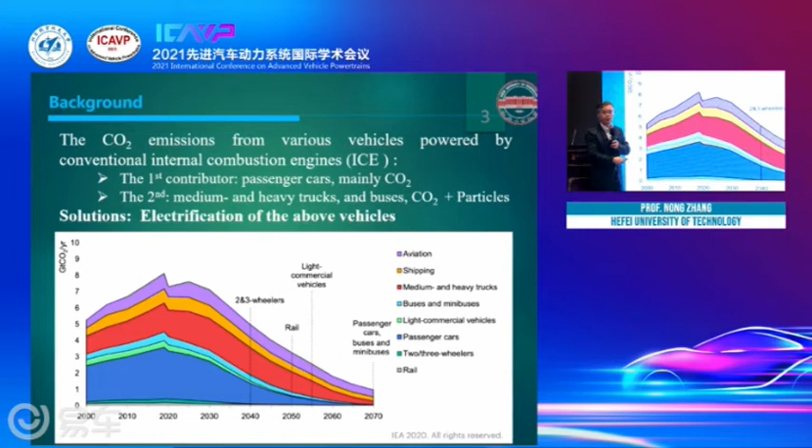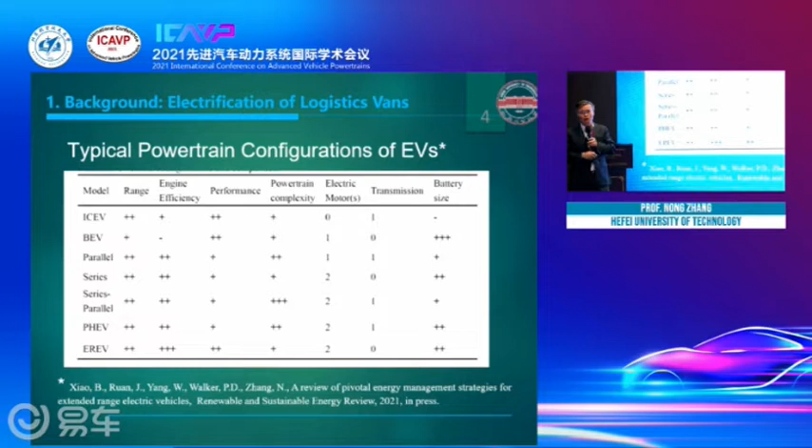Then you say, okay, let's use parallel or series hybrid electric vehicles. If you look at all these, battery size can go down, but cost-wise you need more motors, and performance-wise you have a problem as well. So what is the best? I try to say my bit: look at range extended electrical vehicles. You can cover the need of the range. You can have a very good efficiency of the engine because you always can run your engine at the best sweet spot. Performance-wise, depends how much money you want to spend - use a larger motor, larger battery, or larger engine, and you could get the performance you want. Powertrain complexity is simple: pure electric drive plus a battery charge package. We do need 2 electrical motors, but in transmission, we don't need any more transmission. So overall, the battery size can be small. So from this, you will see naturally the extended range electrical vehicles probably is the good solution, particularly for the electrical logistic van or trucks.

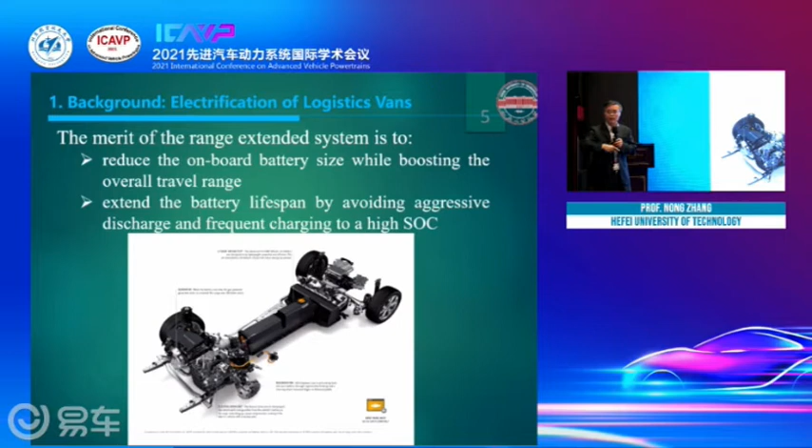Now, first, if you have a range extend system, you can reduce the size of the battery very significantly. And also, because you have an onboard charging system, you can supply some electricity directly to the driving motor. Then you can reduce the electricity demand from the battery. You can help enlarge the battery life. So it's actually good.

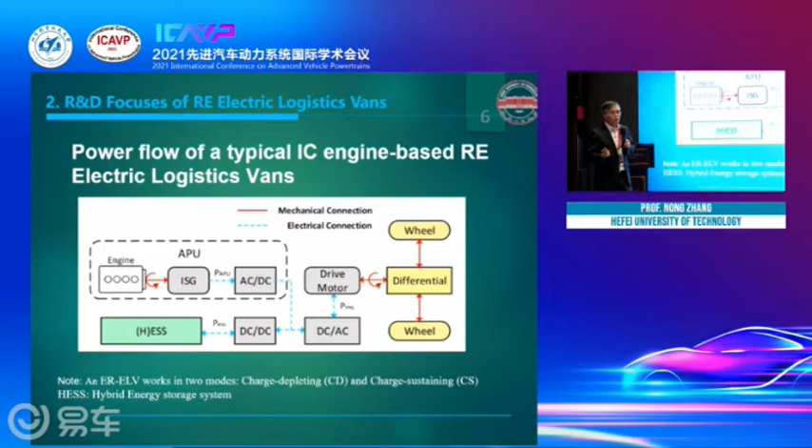Now, for the range extend system, this is a range extend system for the powertrain. You have an engine-driven generator to generate electricity. That electricity can be sent to your driving motor, or you can send it to your battery to charge it. The logic is quite simple.

Okay, what is the advantage of the range extended electrical logistic van? Let me read it through.

Acceptable driving performance, good and excellent engine efficiency, and a small battery size and simple BMS. The battery management system can be quite simple. And good and desirable driving range, especially for refrigeration needs.

Don't forget, commercial vehicles transport food, medical equipment, medical sort of medicine. You need refrigeration to keep the goods safe. So second, for refrigeration there's demand for electricity, right? Then low fuel consumption and operation cost, and also other costs.

Simple powertrain configuration, low development cost, and your range extend system is reusable. Even when your vehicle is run down, the engine and motor you still can use. Lots of benefits.

Then what do we need to do to help our industry actually use or apply the range extender system? Here's a few points.

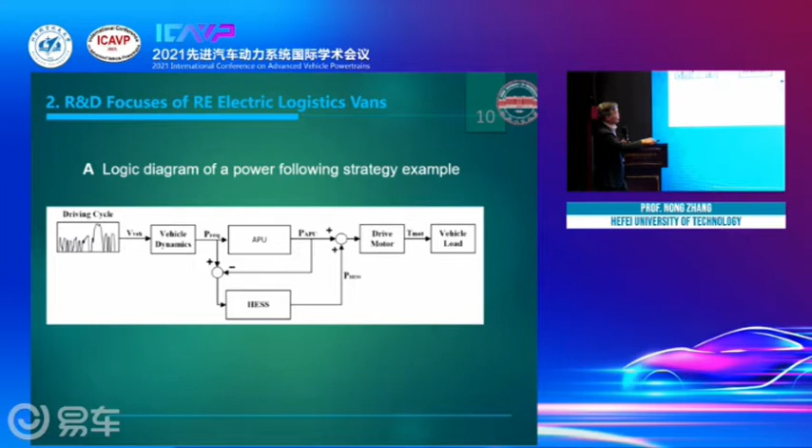Now, control logical diagram. Say you have a vehicle situation, a load situation. You are given a speed target. Then the vehicle decides how much power you need for the driving motor. That command, that instruction or demand, is sent to your range extend system or to your battery. One part of the power comes back from the range extend system, another part from your battery, and these combine and are sent to the driving motor. It's very simple, really. So that's the power flow.

Let's see the control logic behind this. Say the drive cycle depends on the speed demand, you have a power requirement. That power requirement sent to the energy management system first checks your battery situation, the state of charging. If the state of charging is less than, say, 45%, then you can't use charge-depleting mode. You need to turn off and turn on. You need to turn on the range extend system to charge the battery or supply the power, and vice versa.

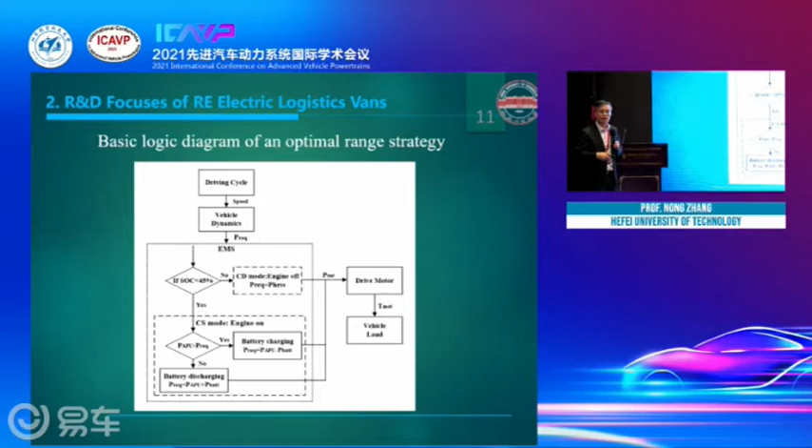So you come to here, this is called engine on mode. Basically it's charging the battery or driving the motor. This is the integrated demand from your driving motor and the battery. You need to consider the battery situation, the state we call state of charge. You need to consider that.

About the charging, there are mainly two range extender system charging strategy methods. One is called the power following method, another is the optimal range method. The power following method is relatively simple, but not as efficient as the optimal ranging method. The optimal ranging method is probably more complex. You need to do a little bit more pre-development to make it work properly. So again, I'm not going to go into the details. If you like, you can find these references and read the report.

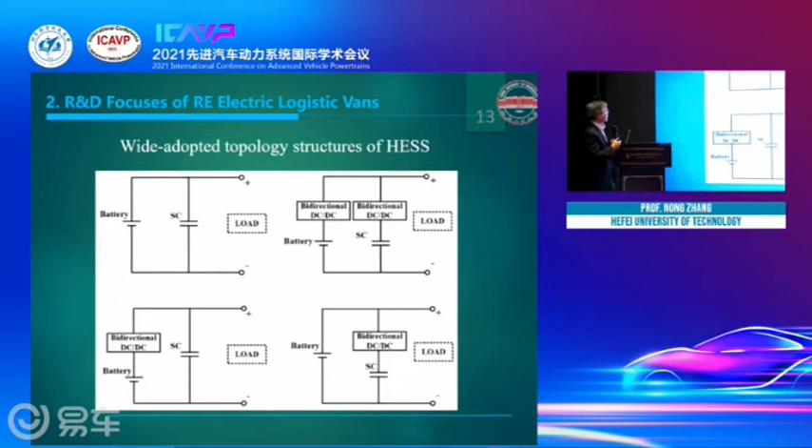In order to further improve the efficiency of the whole powertrain, you can also have what we call a hybrid energy storage system, which includes normal batteries plus a supercapacitor. This combines the energy density and power density. If you want to maximize the regenerative braking, you need a supercapacitor to receive the larger current, right? So these are four possible combinations of your hybrid energy storage system. Okay.

Okay, so this is a brief introduction of the range extender systems, the advantages and the disadvantages, or the existing issues we need to overcome. Now, what is the problem? If the range extender system is so good, why is it not widely applied to commercial vehicles or passenger cars? Actually, for passenger cars, Li One is very successful, which is an electric vehicle with a range extender system. So you can see plenty of successful examples. In Japan, the e-Power vehicle is also a very good successful example. For passenger cars, you can already see these very successful applications.

But for logistic vehicles, we don't see many yet. So what are the problems or issues? In my viewpoint, the first part is the coordination of the range extender system and the battery systems. We know what we need to do, but we do not have any in-depth or very experienced understanding of the needs of this, right? So we need to do more research and work to get a better understanding of this part.

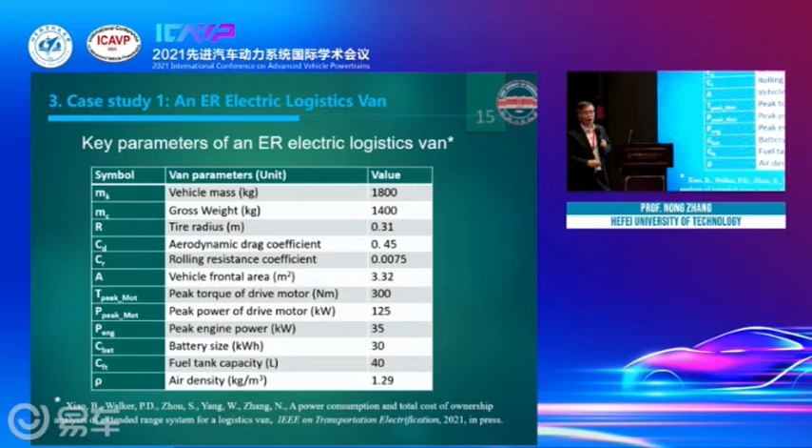The next part is case studies. My PhD student did simulation work based on a very typical logistic van, with a vehicle mass of 1.8 tons and a gross weight of 1.4 tons. Altogether, it's 3.2 tons. We add a range extender system powered by a small engine with 35 kilowatts power. Let's see what result we get.

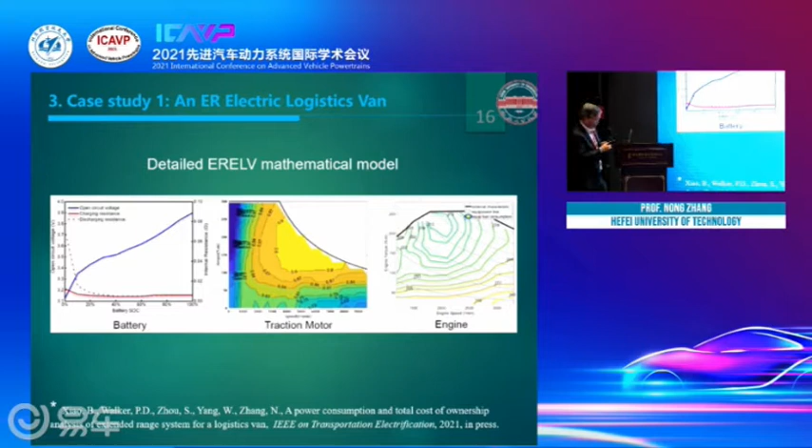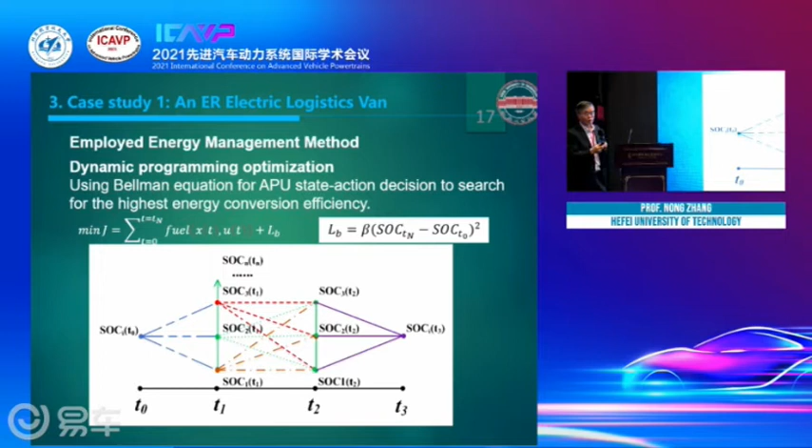So, based on the battery model and traction model, the energy map of the traction motor and the engine mapping, we can start to do the energy management system optimization. In this case, the energy management method employed is dynamic programming optimization. Probably most people know that, so I will not go into detail. Just see the result. The driving cycle we use is CLTC.

When the battery is still fully charged, we use the battery more. But when the state of charge gets low, we use the range extender system more to generate the electricity. The green part is the electricity you draw from the batteries. The red part is the electricity from the range extender system. When the SOC becomes lower, we start to turn on the range extender system more often and it works more. So you get more electricity from the range extender system, right?

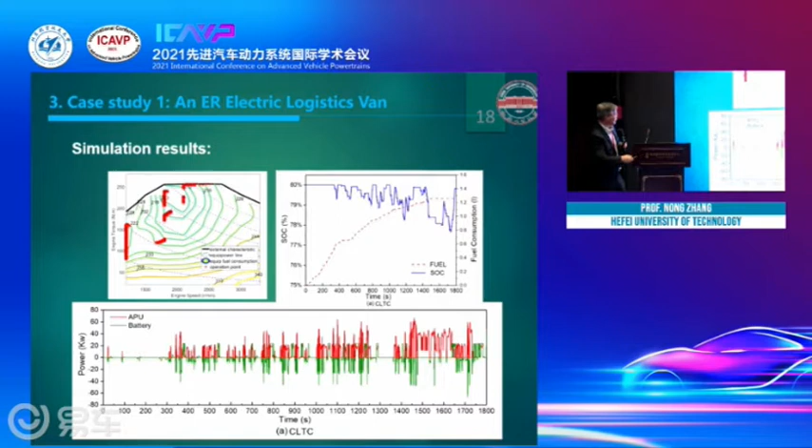By doing so, you can see, if you look at the consumption of the fuel, this is the diesel fuel. For the range extender, like the extended range electrical logistic vehicle, the battery size is 20 kilowatt-hours, and for the battery electrical logistic vehicle, the battery size is 60 kilowatt-hours.

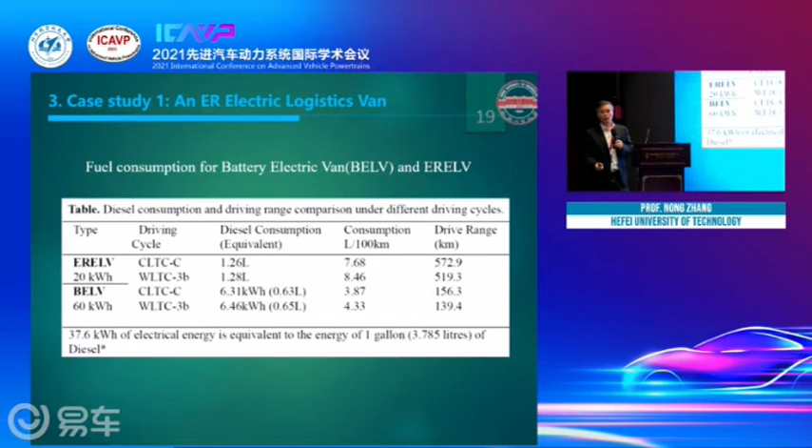Same 2 driving cycles. We did some simulation, which shows when you use a pure battery electrical vehicle, yes, efficiency-wise it is good. However, your driving mileage is low, only up to, say, 156, and another case is even worse for driving cycles. However, for extended range electrical vehicles, your fuel consumption is not so bad. Every 100 kilometers is about 8 or 9 liters, but you can drive a range up to 550 or 600. Big difference, right?

Then you look at the cost-wise, because in China, the cost of a logistic vehicle is very sensitive and very important. The customer always pays attention to the price of the vehicle and also the running cost. So you have to make sure the vehicle you produce is at low cost. People can afford to buy it, can afford to use it. Then we did an analysis over the life of the vehicle.

If you use an internal combustion engine logistic vehicle, say with lower fuel price or high fuel price, the overall price of the vehicle is between 78,000 to 85,000. The price of the vehicle includes your purchase price plus the use of the vehicle. This is in US dollars, okay? Now, for the battery side, you get 82, 83 in between.

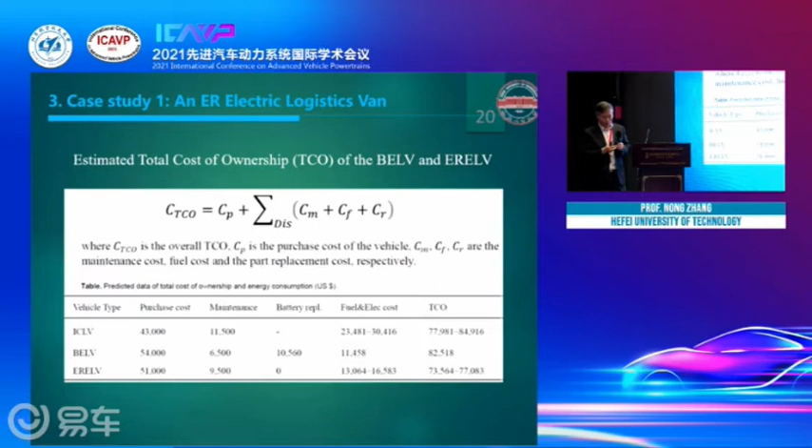For the extended range electrical logistic van, you actually get a price range of 73.5 to 77. So even for the highest fuel price, this number is still lower than the pure electrical vehicles. That means even for price, when you use a range extend system, the vehicle's overall cost is the lowest.

But when you use it for a period of time, you can see the cost of the traditional vehicle is going up. And for the battery side, at one stage you have to change the battery. That will give you a sudden increase in the cost of your vehicle. Only the vehicle with a range extend system keeps going, and the cost in the end is lower. Keep in mind, even if your vehicle is run down and you want a new vehicle, the range extend system is reusable. The engine generator is reusable.

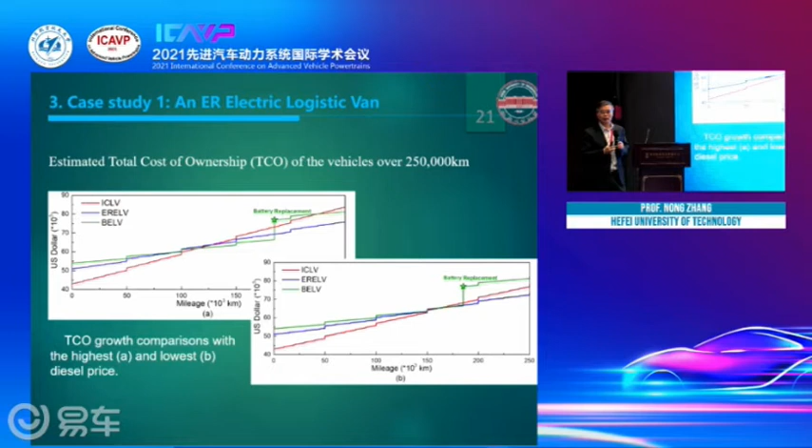Okay. Oh, sorry. Well, this is for the lowest fuel price, and this for the highest fuel price, and you can see the traditional vehicle going up a little bit higher than the battery vehicle. But if you use the range extend system, it's still lower than the battery powered electrical vehicles. Okay. Now that's case study 1. I will present case study 2.

You told me one more point we missed: if we say the extended range system is good, then you ask why people don't use it. Why don't people apply it? There is a problem. Everyone says, how can I get such an engine? Who can supply the engine to me? Not many. Now, what is the best engine for range extend systems?

In my viewpoint, first, the engine has to have high fuel efficiency and lower emissions, both CO2 and harmful particles. The engine has to be small size and low weight. The engine has to have excellent NVH performance characteristics. The engine also has to suit small vehicle chassis packaging, meaning it's small enough that you can package it into the vehicle easily. And low maintenance cost, for sure. Everyone loves that. Low cost and simple powertrain integration, low development cost, reusable range extension, and so on.

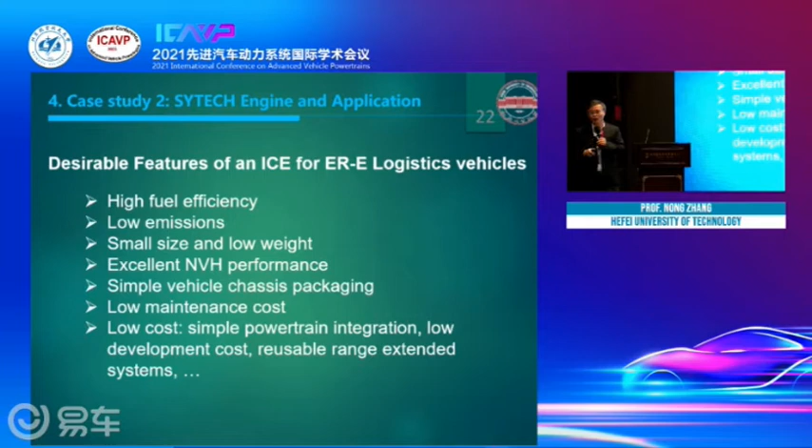So who will do that part for them? So this actually is a real cost. So if you can develop a simple engine, a simple range extend system, and put this system into the vehicle easily, every OEM of logistic trucks and vans would love it. I'm very sure.

So what is the best engine for this? Now I would like to introduce it, it's called the SYTECH engine. This engine was initially developed in Australia. Recently, a Chinese businessman bought the IP to redevelop this engine for range extender systems. We call it the SYTECH engine.

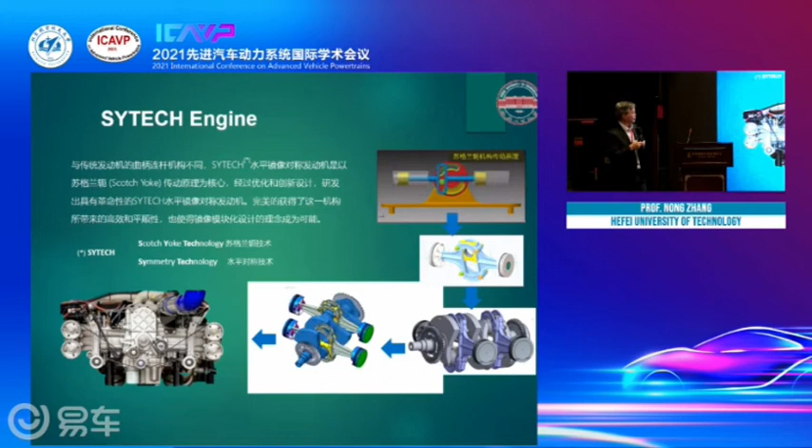But actually, the engine is not like a traditional engine. The engine uses a Scotch yoke mechanism for the translation between linear motion and rotation. This engine has a few really good features which we do want for a range extender system. Okay,

first, we do not use the crankshaft, conrod, piston type of structure. We do not use that mechanism anymore. We use a Scotch yoke mechanism to translate the piston linear motion into the crankshaft rotation. You will say, the Scotch yoke mechanism is an old idea. Why do you use it now?

Yes, it is an old idea, but so far there has been no good idea for designing the bearing to make this work. So this Australian company, now a Chinese company called SYTECH Technologies, invented a special type of slide bearing. That slide bearing can provide enough lubrication to couple the linear motion and rotation together without overwear, without too much frictional loss.

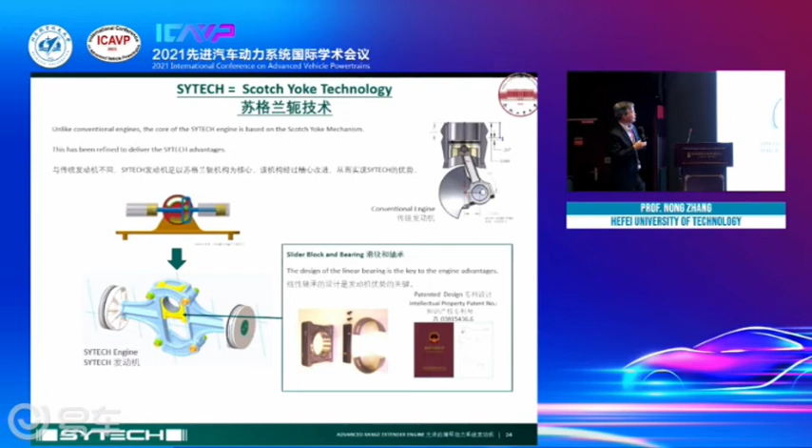And why is this engine good? Because with the Scotch yoke mechanism, the conversion from linear motion to rotation is a perfect sine wave motion. When you fire your engine, if you use the traditional crankshaft piston engine, the shape of that wave is very sharp, a quick rise and a very rapid drop. That is not good for the combustion process.

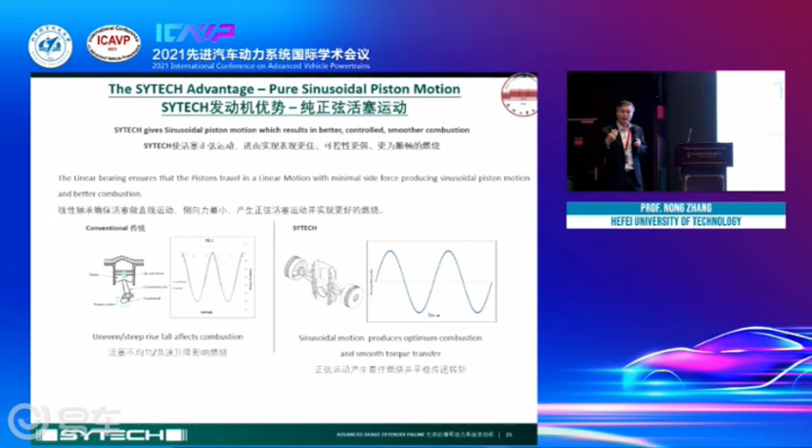So if we use this mechanism, you actually make this a sine wave, so you have enough time to get the fuel mixed and burned, so you get better fuel efficiency and less knocking.

Also, because it has horizontally positioned pistons, you have two cylinders of a traditional four-cylinder engine. A traditional engine has this length, but when you use the SYTECH engine, you actually cut the length almost in half, a little bit larger than half. So size-wise, it's very small.

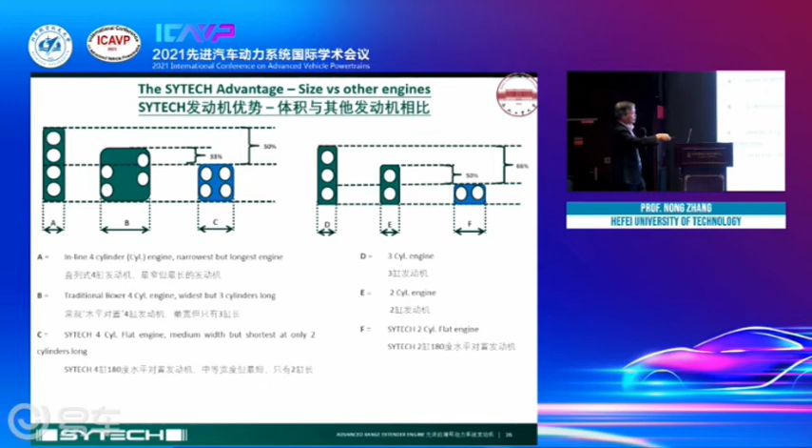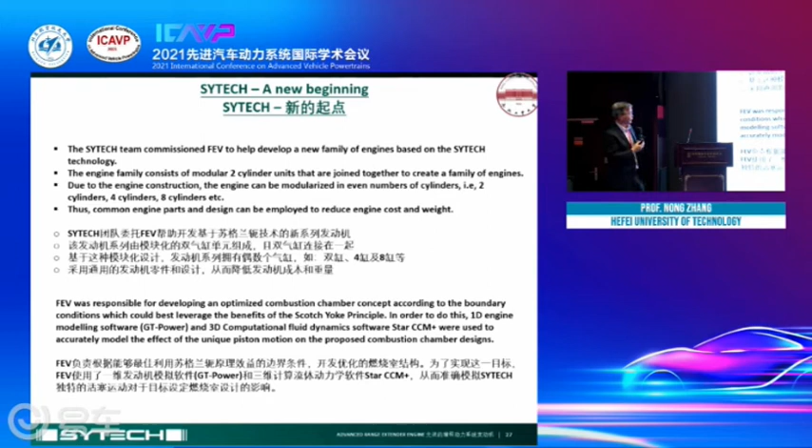Of course, you can develop 2-cylinder, 4-cylinder, and 8-cylinder engines, modularizing the engine development. This company also contracted FEV in Germany to help make the conceptual engine and the first and second generation. Currently, the second generation engine is in the assembly process, and testing is planned by November this year. We will get 4 sets of testing results for the engine.

So I'm not going to go into the details. I'll just give you some boundary conditions for the engine design. Basically, the engine can be a 2 or 4 cylinder engine. We try to keep it under 1.5 liters capacity, because in China, under government regulations, an engine with a volume less than 1.5 liters is defined as a small engine. So we want to keep the engine within this range.

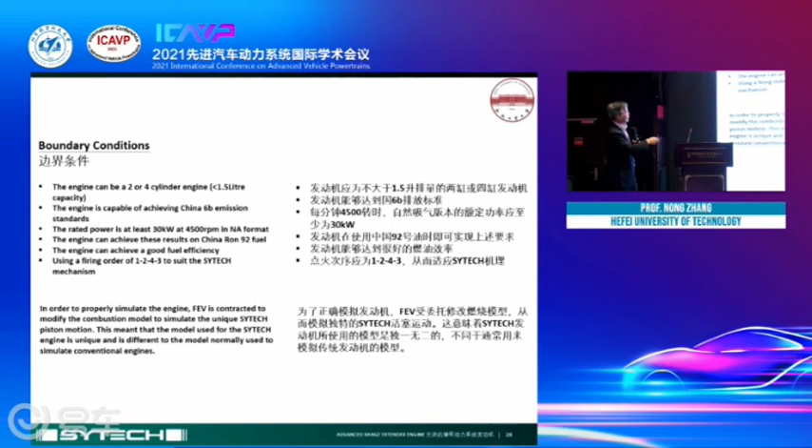The engine has to be able to achieve the China 6B emission requirement. The rated power can be 30 kilowatts at 4,500 RPM, and it can use 92 octane gasoline. And the engine can achieve good fuel efficiency. Also, the engine's firing order is different from the traditional way as well. You really need to redesign the engine. So this work was contracted to FEV, and FEV did that for us.

Recently, in the first half of this year, FEV got the simulation results for what we call the S415TC, which is 4 cylinders, 1.5 liters plus turbocharged. Efficiency-wise, this is an engine without any additional technology like GDI; this is only the root engine. They got the simulation results.

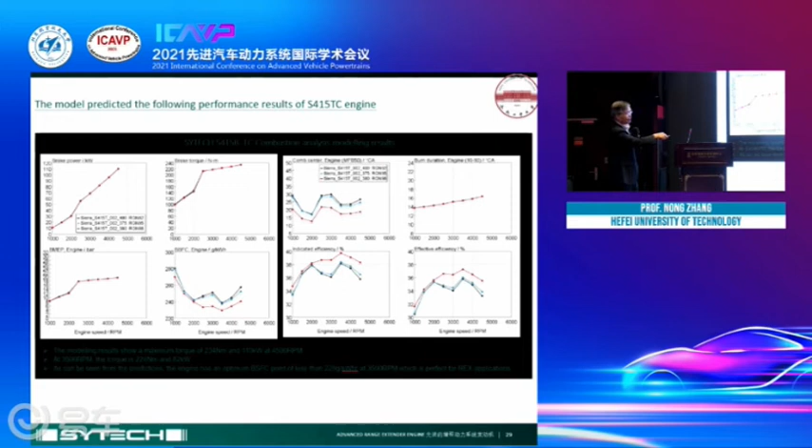If you look at braking torque and fuel efficiency, you can see when you use around 98 fuel, you already get very good fuel efficiency. Of course, if you use poor quality fuel, you get poorer fuel efficiency, but still, it's a good size.

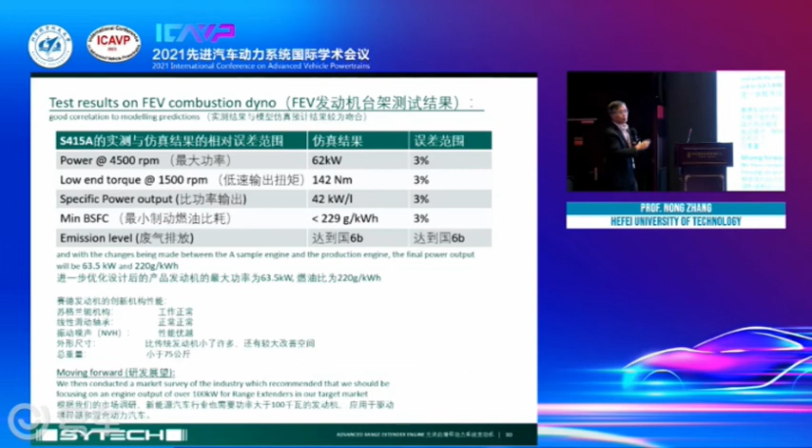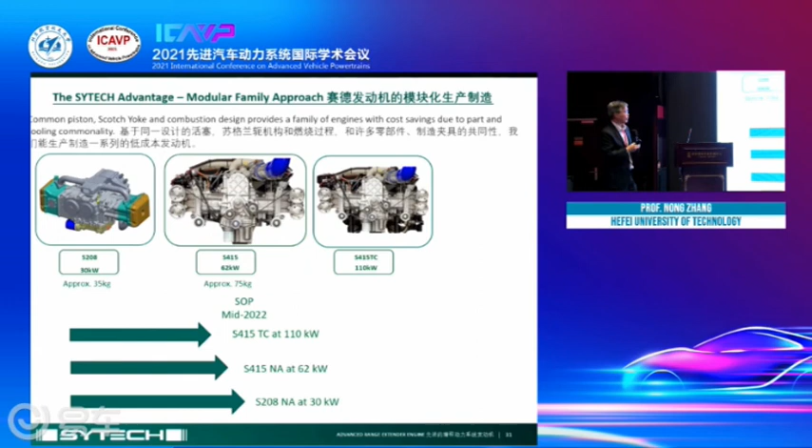The size of the engine, you can see, is very compact and small, and we can develop a two-cylinder engine, natural air, NA at 30 kilowatts, and the four-cylinder engine without turbocharge 62 kilowatts. If we add a turbocharge, we get 110 kilowatts power. Quite a powerful engine. So if we look at this, you may need a turbocharge to increase the power.

We do not need to use VVT, do not use EGR, and even GDI. So a lot of things we don't need to use. Very simple, cheap. And the engine is smaller, lighter, shorter, cheaper, and with very good NVH performance. Very quiet and small vibration.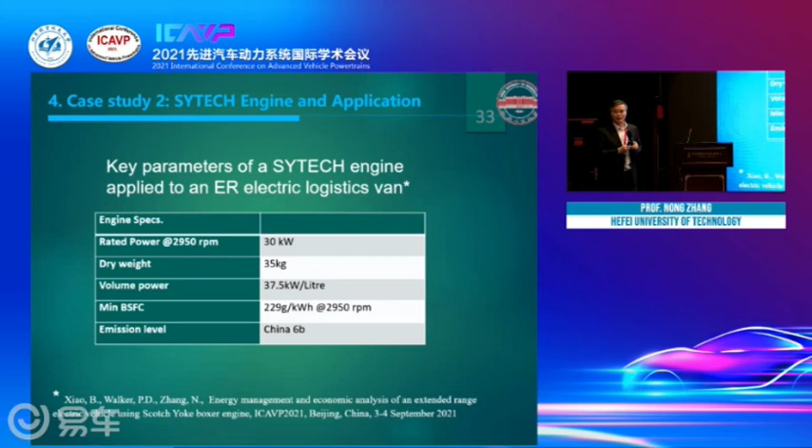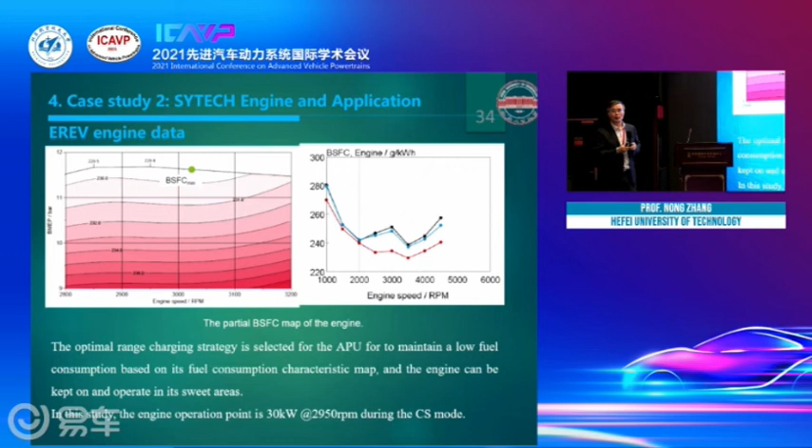Based on this small engine, we did another quick simulation, just to check if it is better than the other engine. This is a BSFC for this engine, and we use this fuel efficiency as indicative of the engine's fuel efficiency. We did a simulation to see what is the cost for an electrical logistic vehicle.

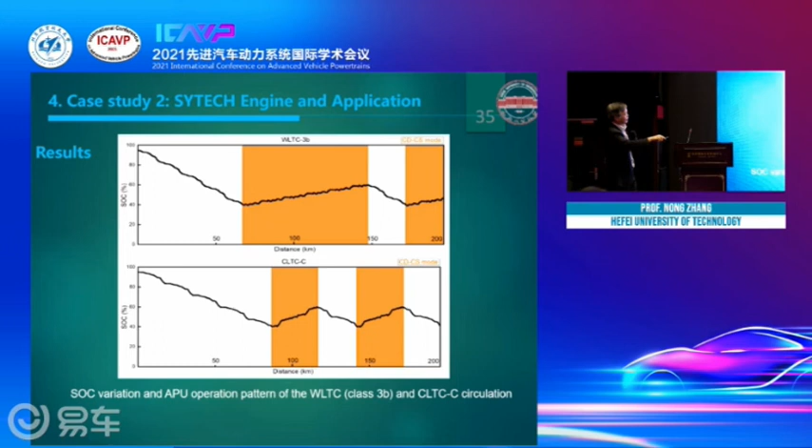This is the result. We show you the state of charge variation for the range extender system for the driving cycle. This is driving cycle WLTC. That's driving cycle for CLTC. This is our worst driving cycle. You can see the state of charge. And this is the result to show you the fuel efficiency of this vehicle.

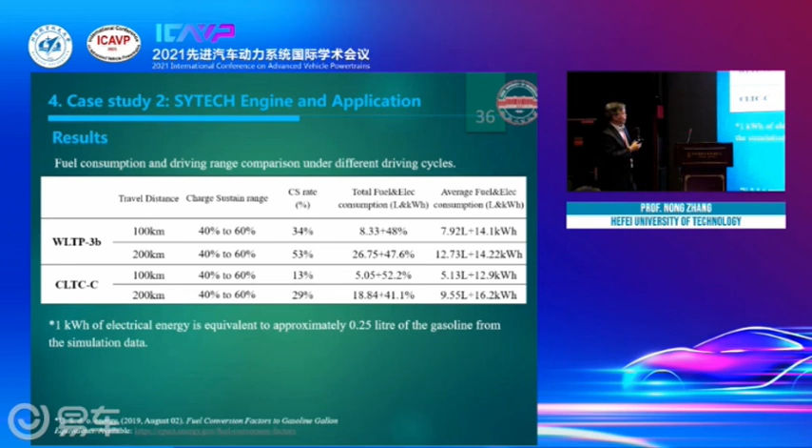As you can see, for this worst driving cycle, for the first 100 kilometers you burn about 8.3 liters of fuel plus 48% of battery electricity. For 200 kilometers, you get a little bit more than that. For the CLTC driving cycle, the fuel efficiency is better because the driving cycle is different, right? So all the data is there, and then let's see the cost.

We also did a similar cost analysis. For a similar vehicle, if you use a traditional engine, the vehicle cost will be, say, 84.5 thousand US dollars. For a battery electrical logistic vehicle or van it will be 85.3 thousand US dollars. But for this new vehicle, using the range extender system plus the electric logistic van, the overall cost is 71,000 US dollars.

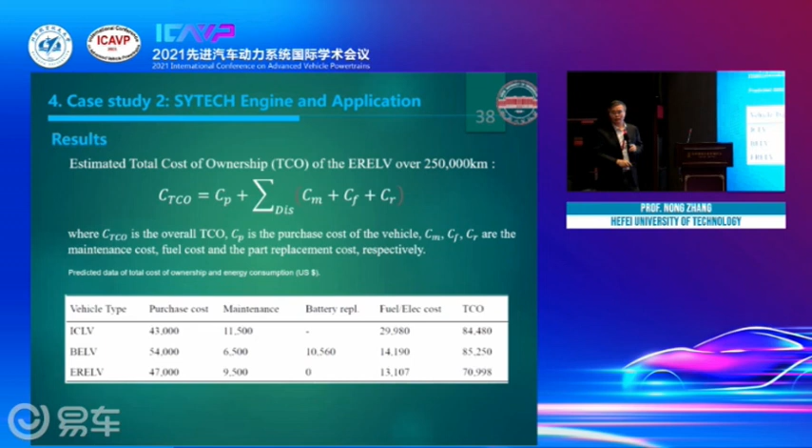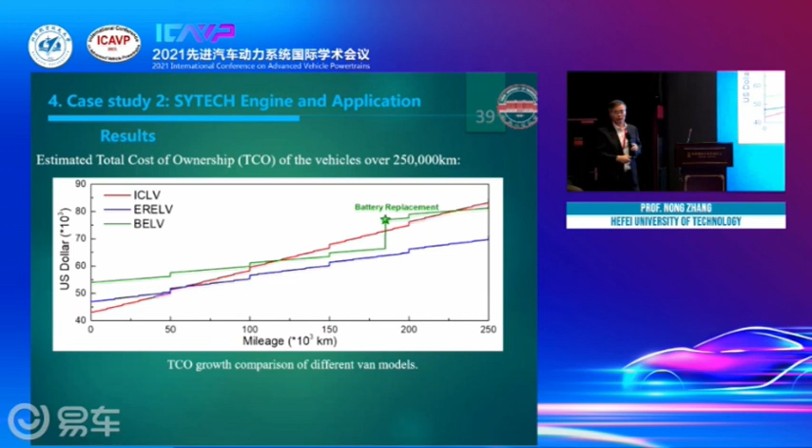How much reduction of the cost? Nearly 20% of cost reduction. Very attractive, right? That's the actual data. Again, this blue line is the extended range electrical logistic vehicle or van, the lowest cost in the end, after you drive the vehicle for 250,000 kilometers.

So my last part is to give you quick concluding remarks. You may not agree with me, then please do some research and development, let's argue. At the moment, this is what I get from my results. First, I would say electrification of logistic trucks and vans is also essential to emission reduction and fuel economy. Don't always pay attention to the passenger car, please.

And then cost effectiveness, we call total cost of operation, in terms of purchase, operation, maintenance, and retained value, needs to be looked at also, because for commercial vehicles that is really sensitive for customers. So extended range electrical logistic trucks and vans offer a realistic and optimal solution. That's my opinion. If you don't agree with me, show me your data.

The fourth point is specially designed engines, such as the SYTECH engine, are very suitable for range extender systems applied to electrical logistic trucks and vans. Why? You can produce in volume, by modulation you can get different sizes, and very small, easy to be integrated into the vehicle.

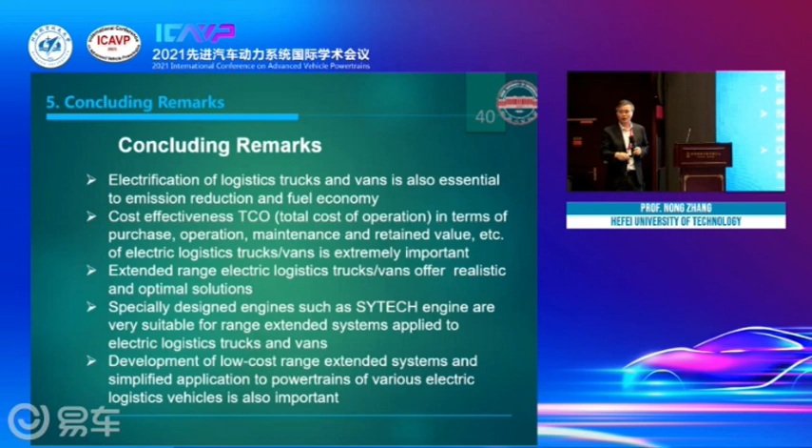Last bit, development of low-cost range extender systems and their simplified application to the powertrains of various electrical logistic vehicles is also important. I just discussed this with Professor Xu. He agreed with me because in China or elsewhere, the OEMs of logistic vehicles do not have a large team of engineers and test equipment to develop this. So we have to make this simple, cost effective, low cost.

So that's my concluding remarks, and I would like to thank my colleagues for their help and contributions, particularly my PhD student, Boyi Xiao. He is still a PhD student of University of Technology Sydney and will probably graduate by the end of this year. And also my colleagues, Mr. Lin Yang and Mr. Richard Tamba of SYTECH Powertrain Technologies in Guangzhou, China. And also, I would like to thank the engine development team of FEV Germany. They did a lot of excellent work for us.